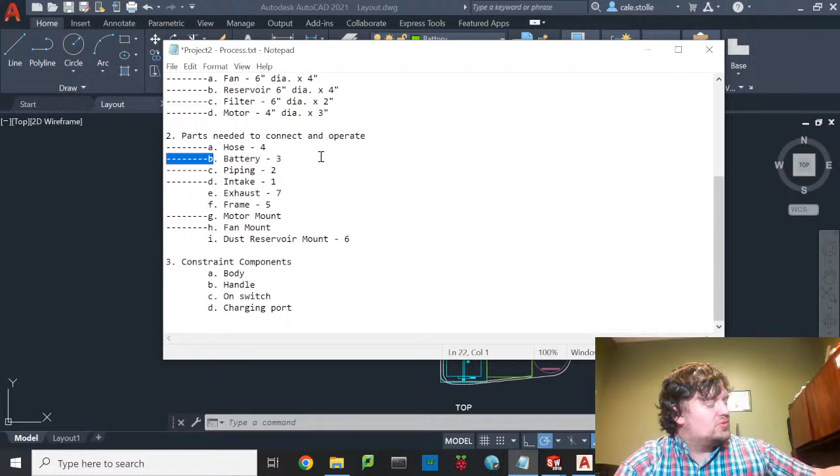I should probably move the microphone a little closer. If I talk right into it, it'll be super loud. Most people who aren't paying attention would just be like, ah, that'd be fantastic.

Our next step - I had this labeled out. We had to come up with the intake, piping, battery, hose, and lastly we have to come up with a frame. Now, the reason why you could have technically made a frame prior to designing all those components...

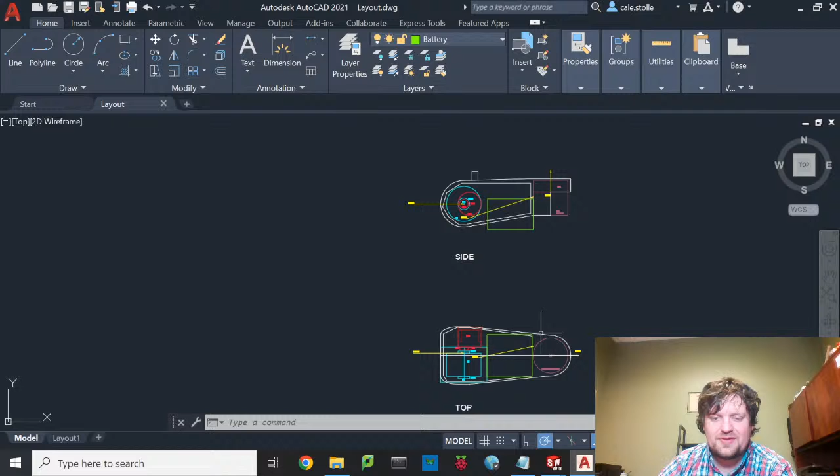Really you could have designed a frame after this and just tried to modify the frame to fit in these, but I don't really want to have to modify the frame. I kind of want the frame to just fit around everything.

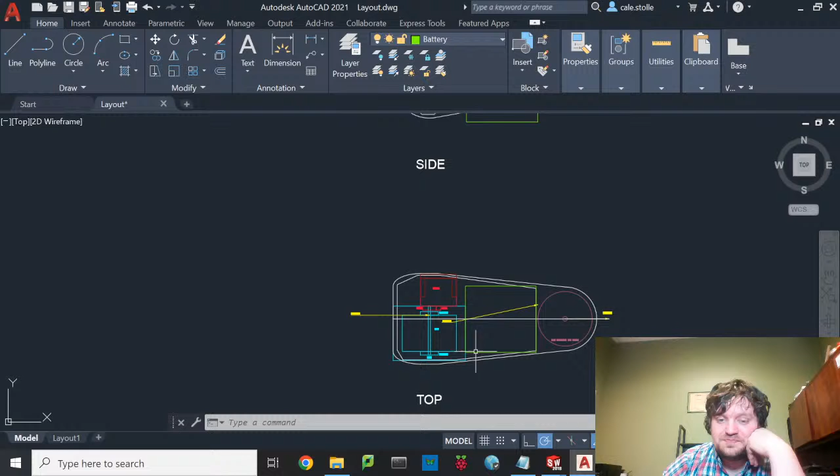So here I've got all of my components labeled. I did discover that my battery is going to have to be sitting under my piping, and I may have to adjust the piping, but I may just be okay with the battery sitting really low. That's actually where I'm going to be closer to, but basically the shape of my frame is going to have to come up here.

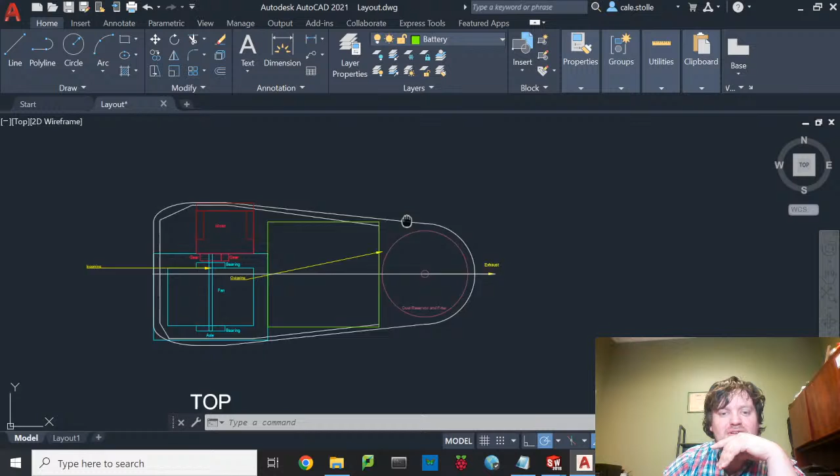It'll have to go around this motor mount, come down here to this fan mount, and it'll probably be kind of a squarish shape. So that's what my frame is going to kind of look like.

You'll notice that I put this in the actual vacuum outline layer. Yeah, I guess that's kind of frame material though. But that's kind of where I want my frame to be.

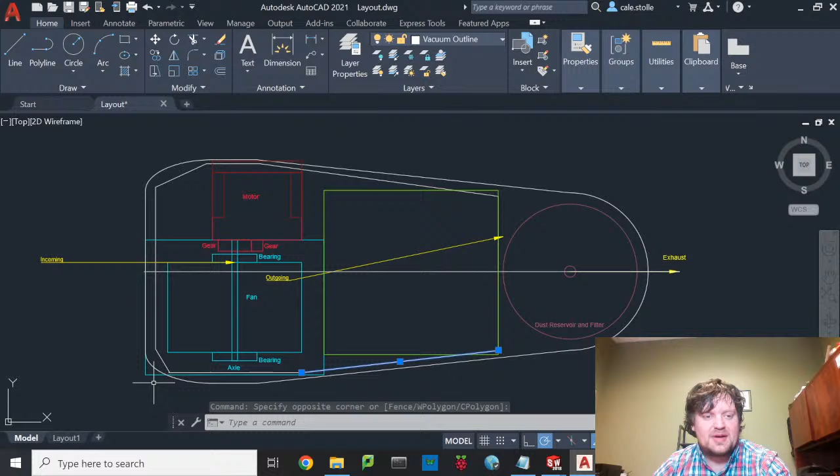I want my frame to wrap around the back edge of this, wrap around this, come down and kind of wrap around this dust reservoir.

Now, my purpose here in building a frame is the frame is going to be the component that everything mounts to. So it's kind of the most critical piece.

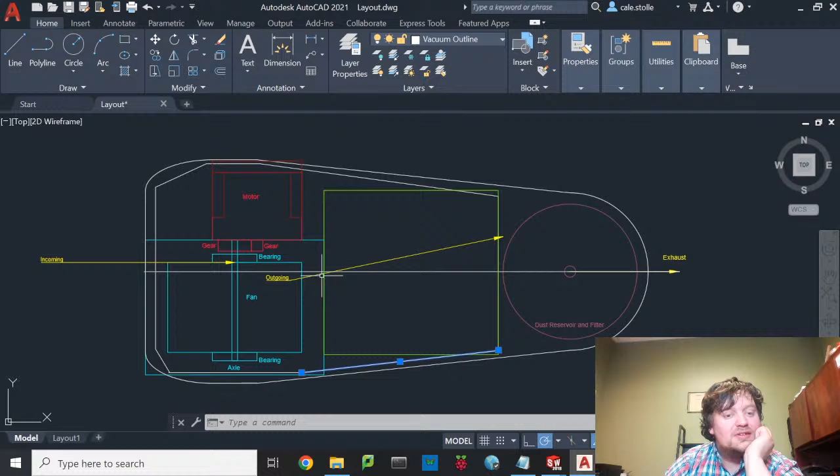What I am going to do very quickly is take some quick measurements in this drawing, because this will allow me to determine some sizes for when I design my frame.

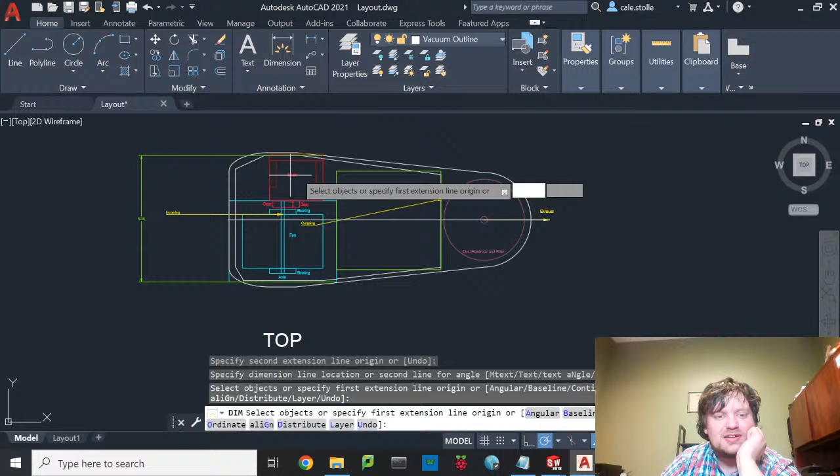So here this is 9.35 inches. What I'll probably end up doing is making a 9.5 inch wide frame.

And I don't remember what this dimension here is. That is 8 inches. Okay.

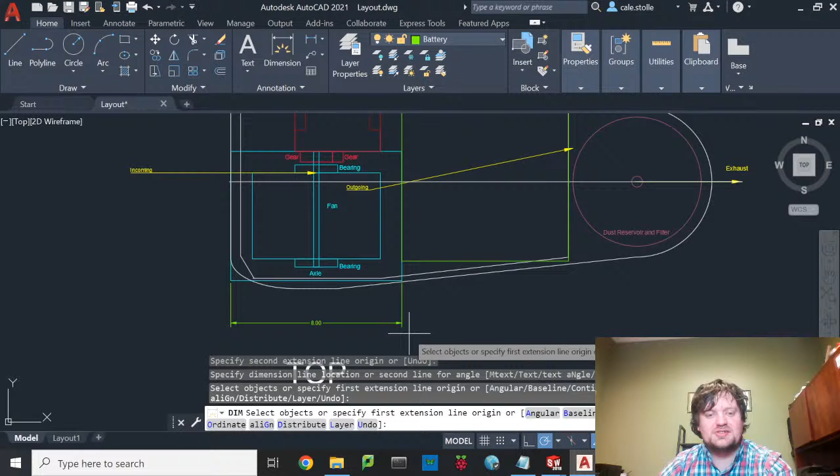So in this view, it'll just be a simple shape that wraps around like this. In this view, I do kind of want it to look like this, so I'll probably just cut out a piece and maybe round the front.

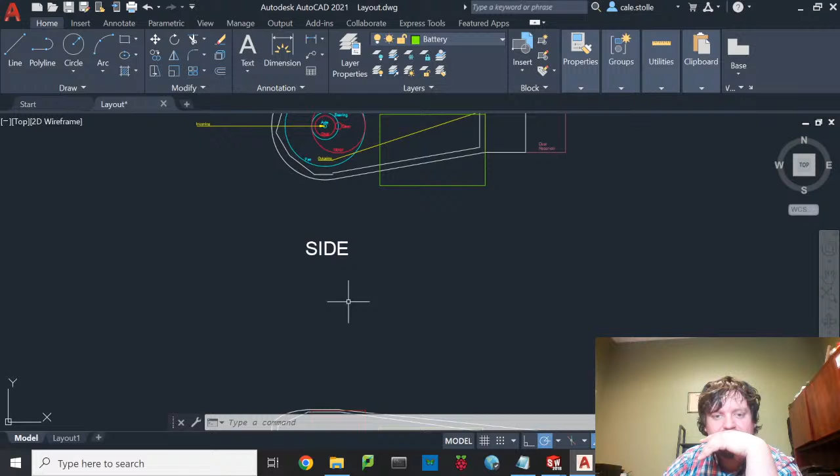We'll start by making this profile shape here, kind of a rounded piece that goes up like that. And then we will cut into it.

Basically, I'm going to make it a hollow box so that it'll wrap around the fan mount over here, but then have a flat surface for the motor mount to mount back here.

And then it'll be a flat surface here, and I could just put a protrusion here and here to connect onto the dust reservoir. So that's how we will design it, and we're going to make it 9.5 inches wide this way by 8 inches wide that way.

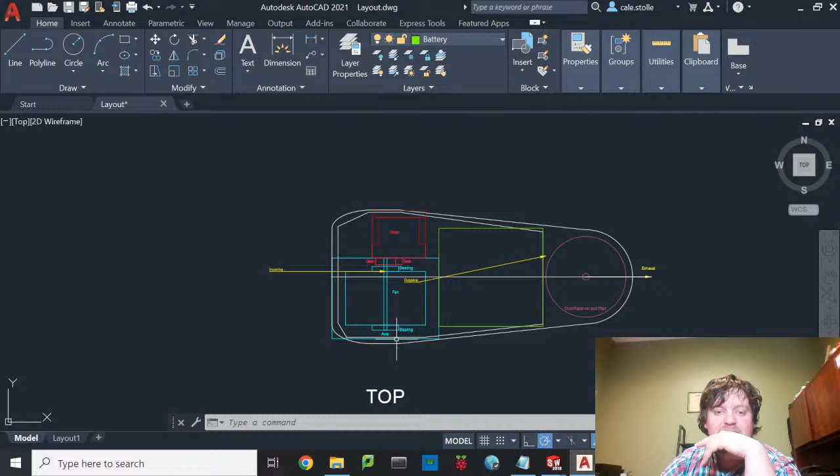So go ahead and drop out of this. I'm going to say no because I didn't really make any big changes. And we'll go ahead and pop up SolidWorks. I only had 2 instances of SolidWorks running. Well done, Cale. Well done.

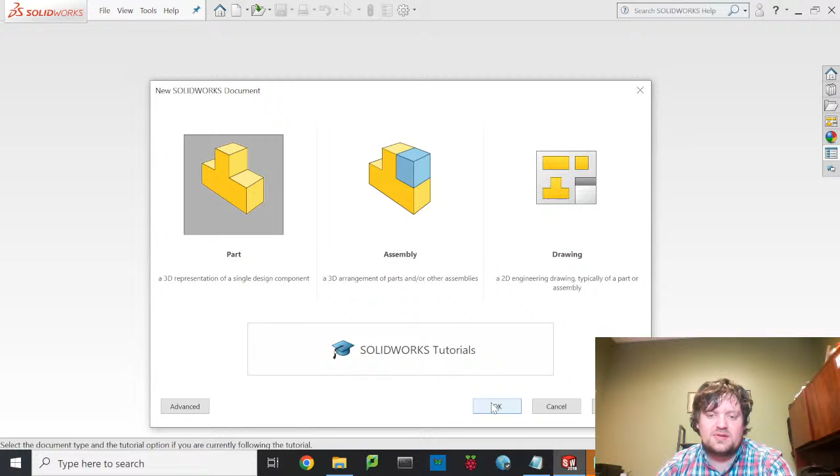So here we'll create a new part. This new part is going to be our frame. I'm just going to make it really simple, because the more complex you make the frame, yeah, it allows you to shape it. You want your frame to fit inside of your body, and it has to be something that everything mounts to, but I feel like the more complex I make it, the more work I'm just creating for myself.

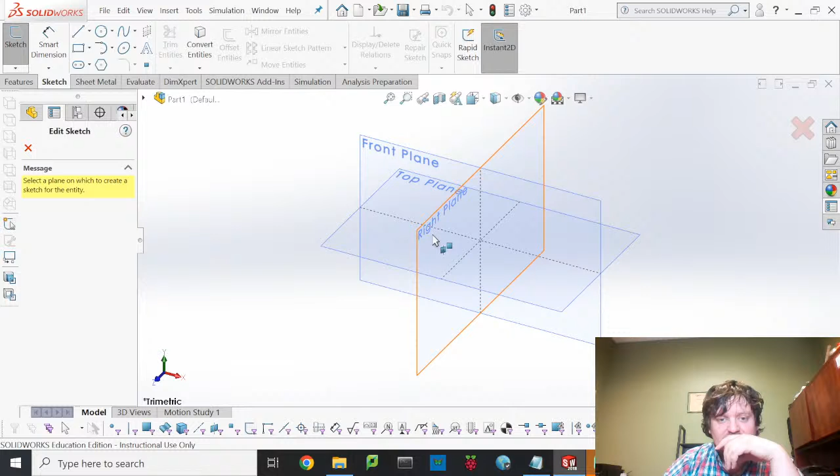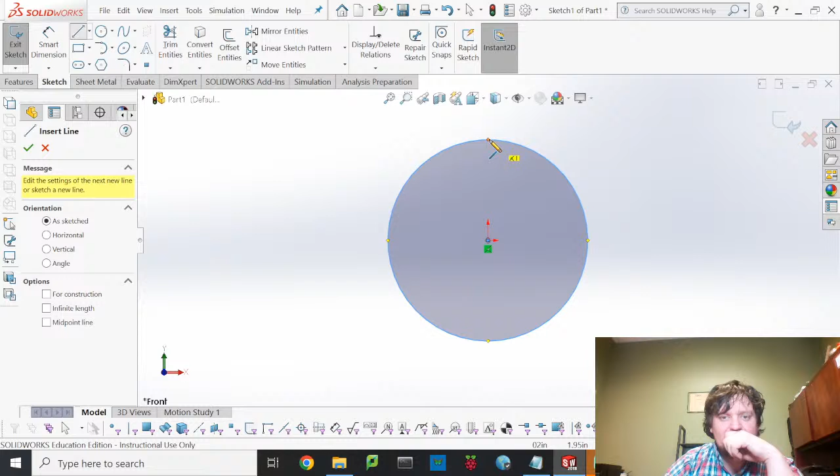And I'm going to create that profile view. Now, where do I want the center of this to be? You know what, I'll make the center of this be the center of the fan axle. So make it this. Then what we'll have is a line that connects from the top of this circle, goes over like this, then comes down and attaches here.

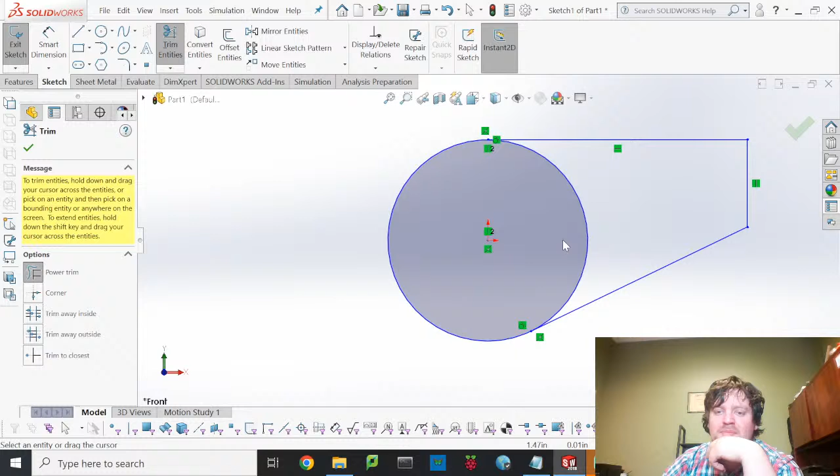Now you'll notice that the way I drew that line, this is tangent. Otherwise I could add in a tangent relation. This one is also tangent, but I mostly care about it being in line with that. Now I'm going to do a quick trim, cut that piece, and now I've got to assign some dimensions to finalize this. I've already got my tangent relation here, and here I've already got my coincident relation. I've already got this being a horizontal relation. This right here already has a vertical relation between this point where this line begins and this center line. All of those are things that I want.

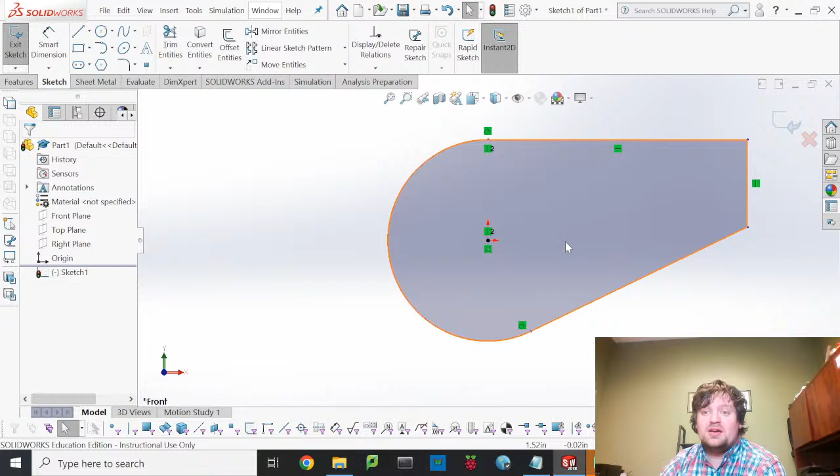So yeah, a couple of dimensions should be all I need to round this out. Now, the way that I have this designed, this is an 8-inch circle that goes into the inside. My frame is going to be about 1/8 inch because it's going to be 1/8 inch, probably ribbed aluminum or something. I'm going to model it as a solid piece of metal, so it would be a lot heavier the way I design it than it would actually be implemented in real life.

But I had the same thing for the battery. I didn't put any air inside the battery, so it seemed like it was like 12 pounds.

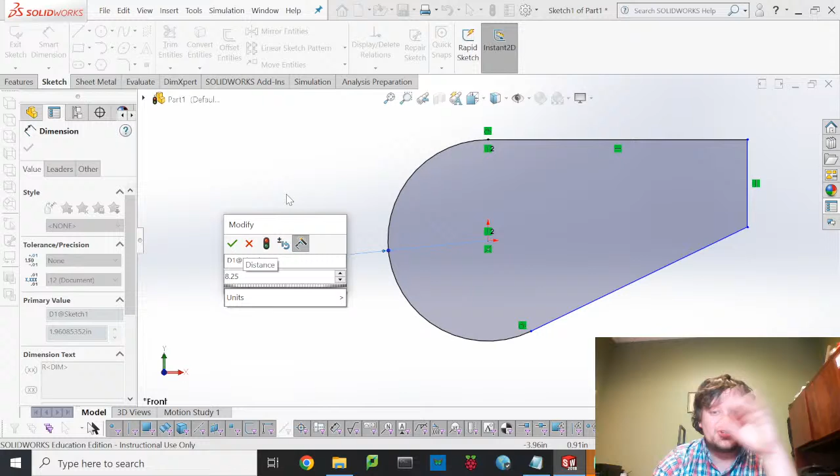Whatever. Here, if I do an 1/8 of an inch on both sides of that fan mount, that does equate to this having a diameter of 8.25 inches. Otherwise, a radius, which is what it's asking for, of 4.125 inches.

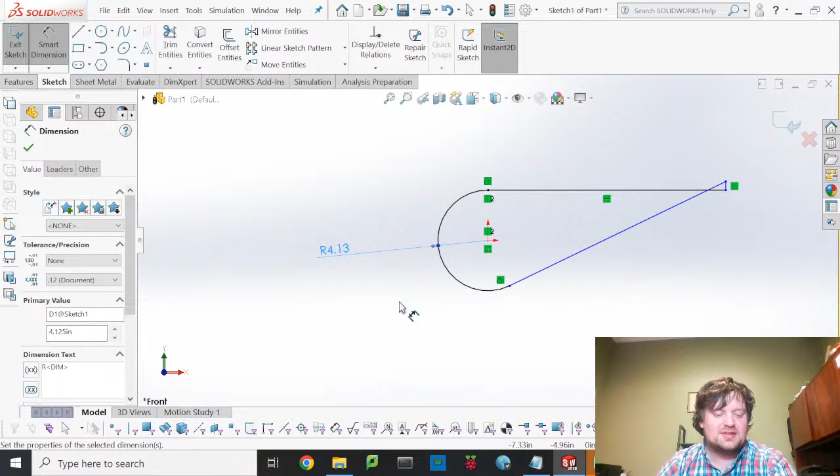I'm going to hit Control Z before I dimension this. Okay, and then we'll go off here, and I'm going to instead start with 4.125 because that's a radius, modeling the radius. Notice how earlier when I set it to 8.25 and then adjusted it, it shifted the drawing. The first dimension you put down is going to basically provide a size for the entire drawing.

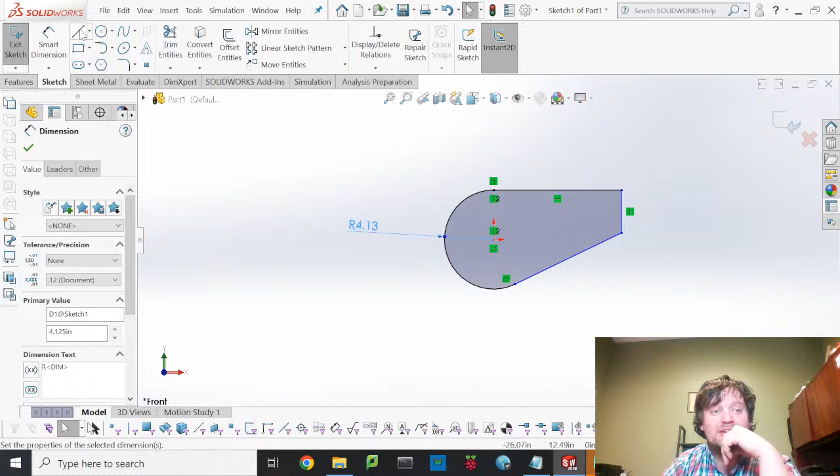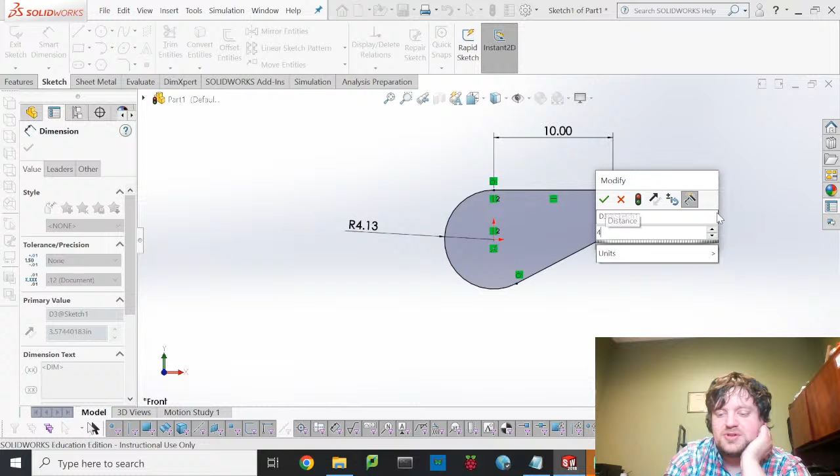So that's one of the nice features about SolidWorks. You don't have to draw it to size, it'll figure out what size you want later on. Okay, so back here, let's see, I don't know, I think that was like 10 inches. I can always come back in and adjust. Here, I'm going to set this at 4 inches, and this should fully dimension my drawing.

So there we go, I'll exit sketch. What I'll do is I will extrude this that direction, and then I'll just punch a hole through the top of this thing. Pretty easy, easy peasy lemon squeezy.

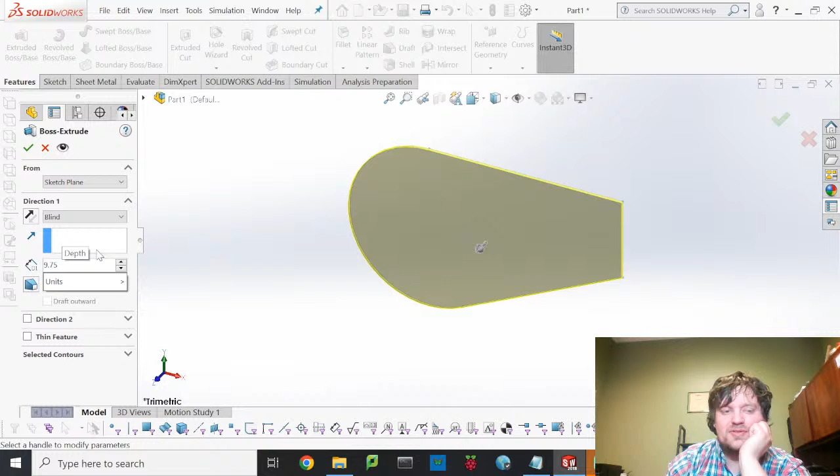So here, the thickness of this was 9.5. Since I want this to be 0.125 on both sides, that's going to mean 9.75 inches.

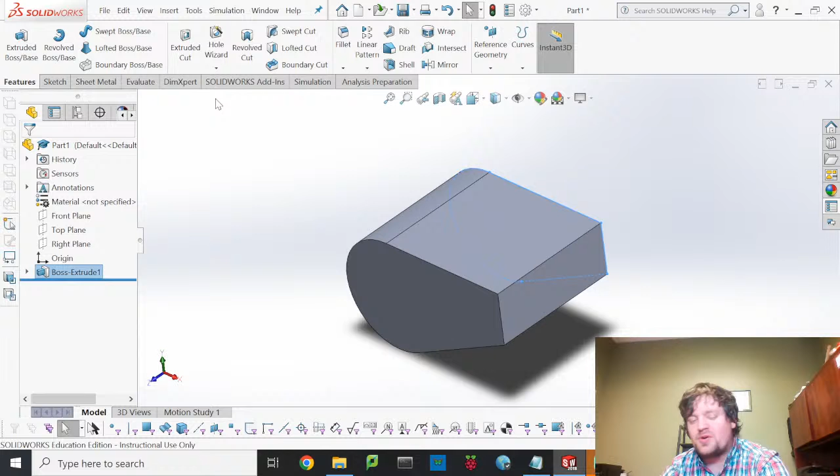Now, if this was a solid block of metal, this would be the most heavy vacuum since the 1990s, when every vacuum was this heavy. All of you fortunate people who didn't have to vacuum in the 1990s. By the way, all of my muscles came from vacuuming in the friggin' 1990s. And it was like, hey, can you go vacuum the front room? Like, all right, I've been training my whole life for this.

Seriously, why were those things so heavy? It's because they used solid metal frames. They didn't use ribbed metal. They didn't use any of the modern manufacturing plastic methods that we have of making frames that are actually nice. I guess I should probably make this out of like plastic. You can make a really hard plastic way lighter than even aluminum.

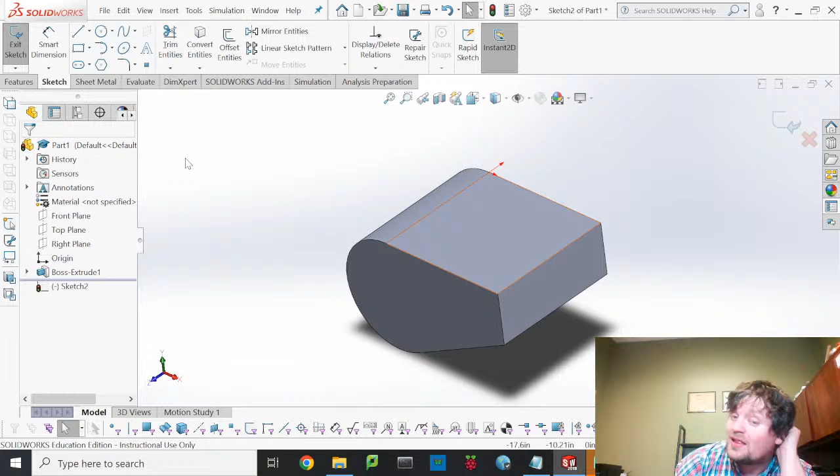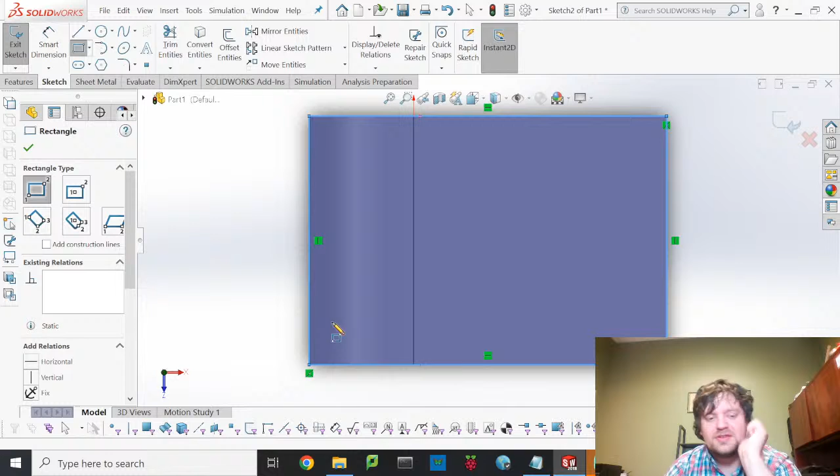Man, I digress. So I'm going to draw on this top plane, and I'm just going to cut out a shape. I'm going to start by drawing this rectangle, selecting this rectangle and setting it for construction. Well, I guess I have to do that on every one of these lines. Escape. So now they're all just construction lines, including this one. Nice, alright.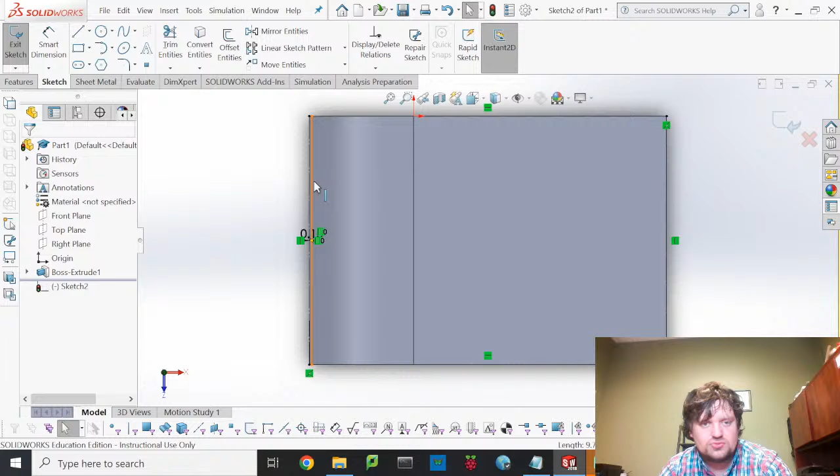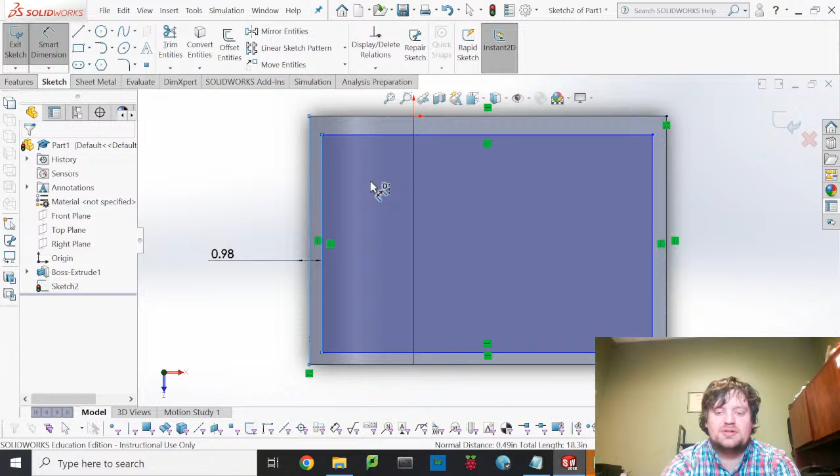Now what I'll do is I'm just going to offset this. That was a mistake. Never mind, instead of drawing it offset, I'll just put it in dimension. Smart dimension, here to here, I want you to be 0.125. Okay, and I'll do the same here to here. And you know me, instead of dimensioning every one of these, which wouldn't really be that much of a pain, I prefer to put in relations.

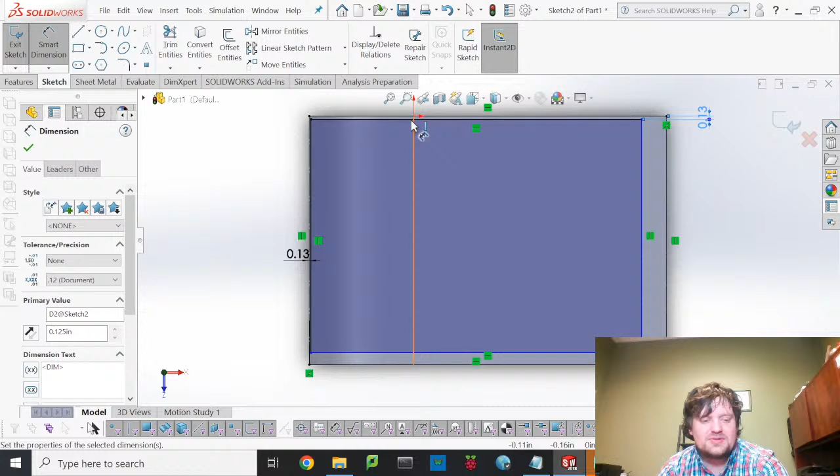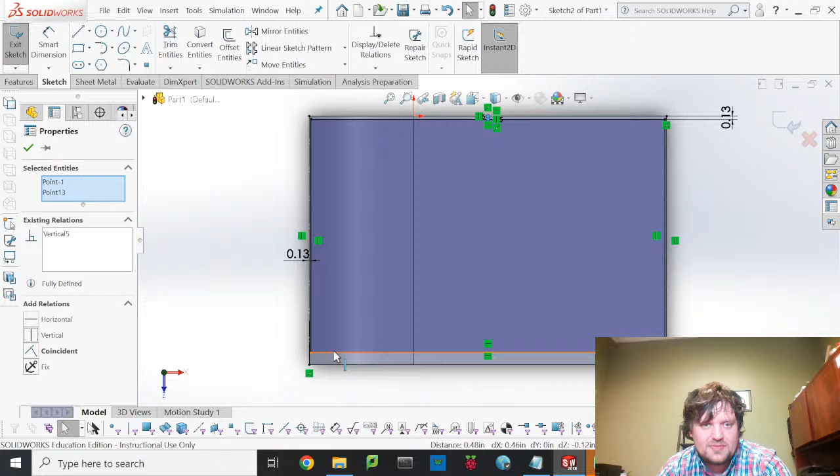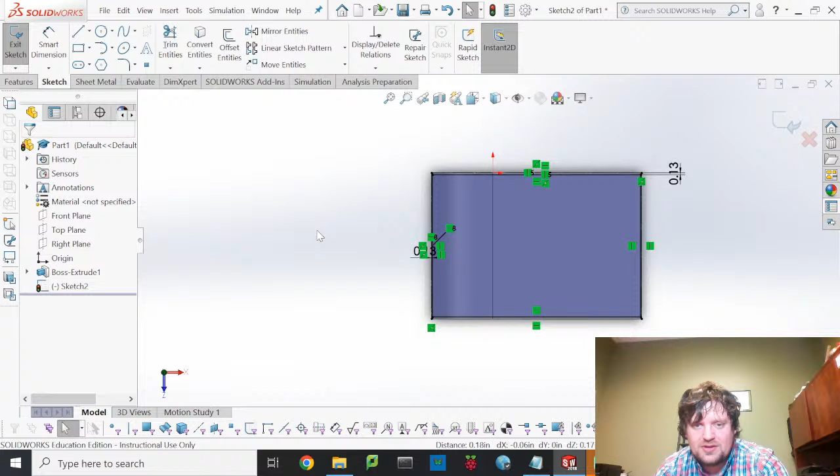So I'm going to go ahead and hover over this one, control click, and hover over the center point up here. Where are you, center point? There you are. With those both selected, it's a vertical. And you know where I'm going over here. Hit escape, hover over the center point, control click that one, hover over the center point, control click that one, set these two horizontal. And at this point, the drawing is fully defined with 1/8 inch gap around the outsides, which is what I want.

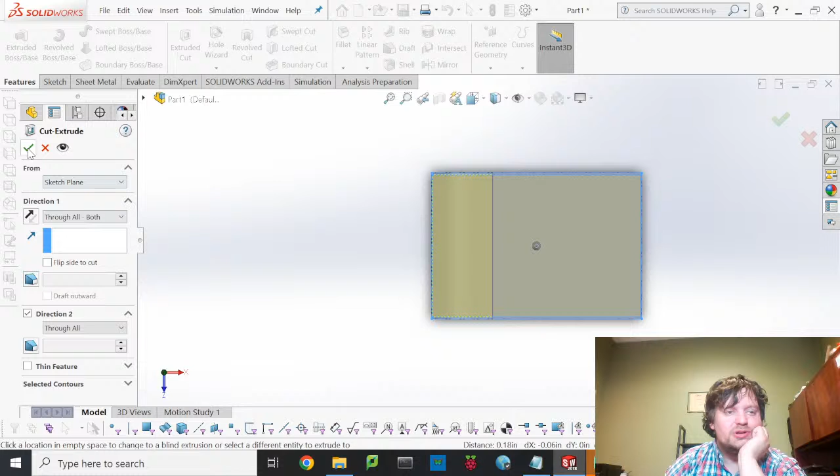So then I'll just do an extruded cut and go through everything, and that'll be my frame. I don't want to do a blind cut, just want to cut through.

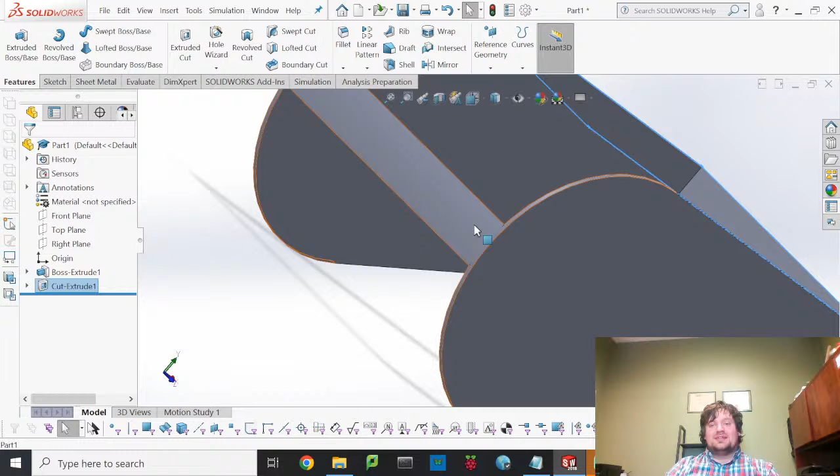Now you'll notice that because I cut this, this piece is going to be extremely flat due to the way I cut it. I mean, that works, but that probably wasn't the best way of doing it. A better route would have been... let me go ahead and delete this.

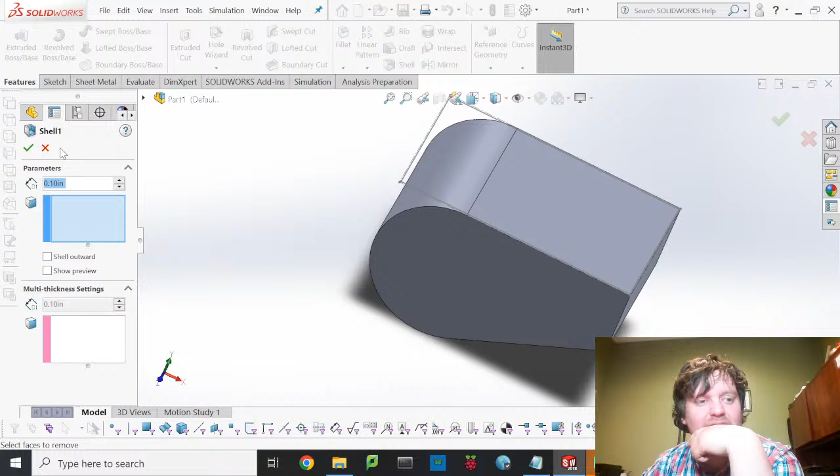A better route actually would have been to leave that sketch there and do a shell instead. Here I want the shell distance to be 0.125.

I didn't shell anything, I don't even know why it saved that feature. I'm going to pick this bottom surface here. Okay, then I can show a preview. It basically shows that it shells the whole thing.

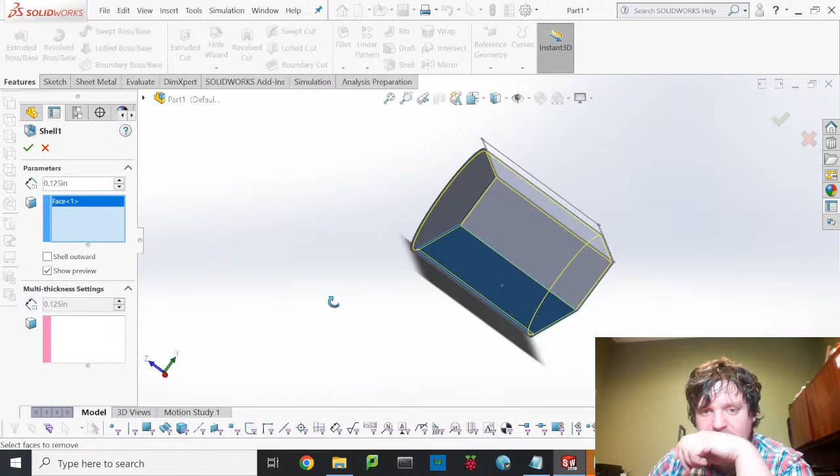Yeah, I like that, so yay. Now what I'll do is I'm actually going to keep everything but this top piece right here.

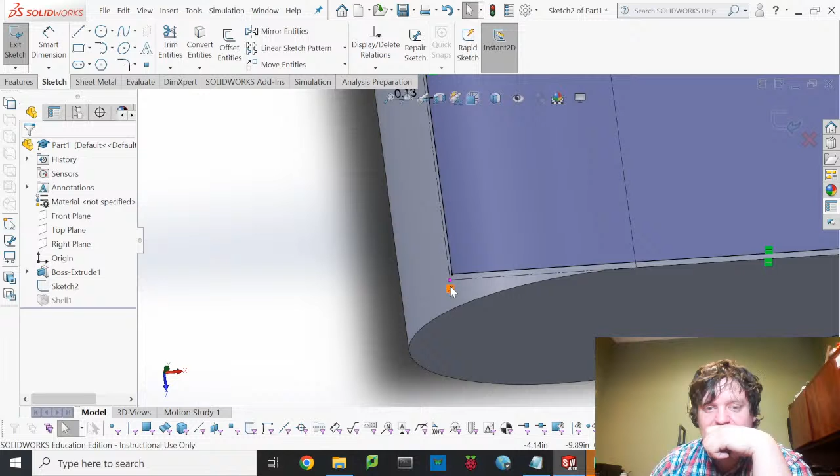So I'm going to go back and edit this sketch. Instead of having this point be coincident with the outside point, which is a projection of that corner, what I want is to pick this point, go over here and control pick that point, and set those to be coincident. It's going to adjust this a little bit.

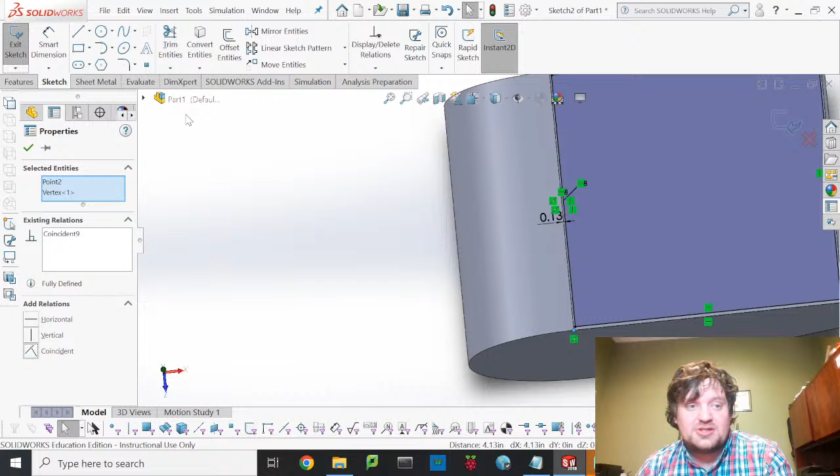Now it'll allow me to cut this so that my frame is pretty rigid right here, but otherwise it's open. So as soon as I do that... oh hey, right, my bad, I deleted the extruded cut.

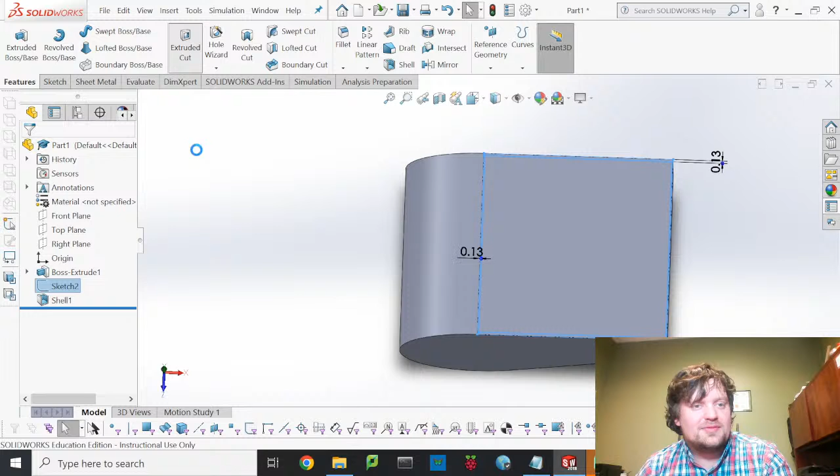I'm once again just going to do through all both. Oh no! There we go.

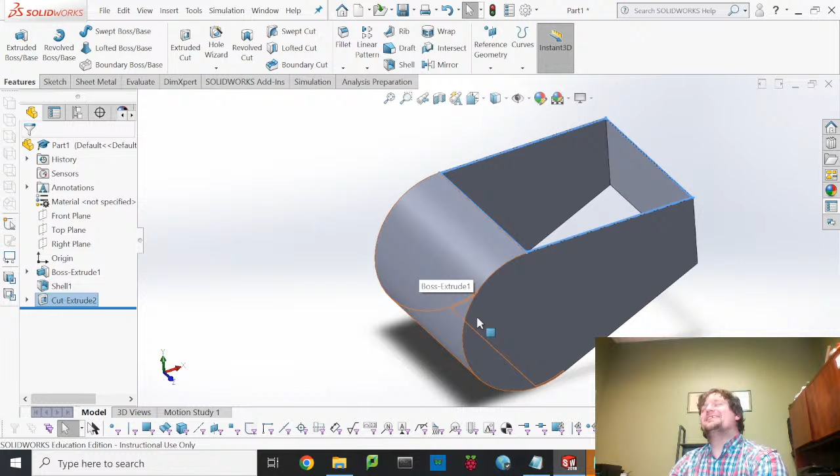So now I have a frame that is a full 1/8 inch, that doesn't just shave the front here, which was a terrible idea on my part. I didn't even think about that. But this is a solid frame.

Now, what I'm going to be doing from here, the next steps in building this frame, is I have to actually create holes to mount components to it. That is a little time consuming, but that is my next step. Having just a frame to mount everything to is the first step.

Now this is kind of a blocky frame, but it's a very, very good piece to start with. I can't emphasize this enough: as a first prototype, you don't mind if it's a little clunky, because it's a prototype, not a full manufactured product. This isn't a final product by any means.

When we go back and actually finish this design, we'll be able to look at the full design and say, okay, there's air space right here where we can bring that frame in, or we can move this part and bring that frame in, or round the frame here, make it lighter this way, find a better battery, find a better motor. There's tons of different ways we can use to really lighten this model up.

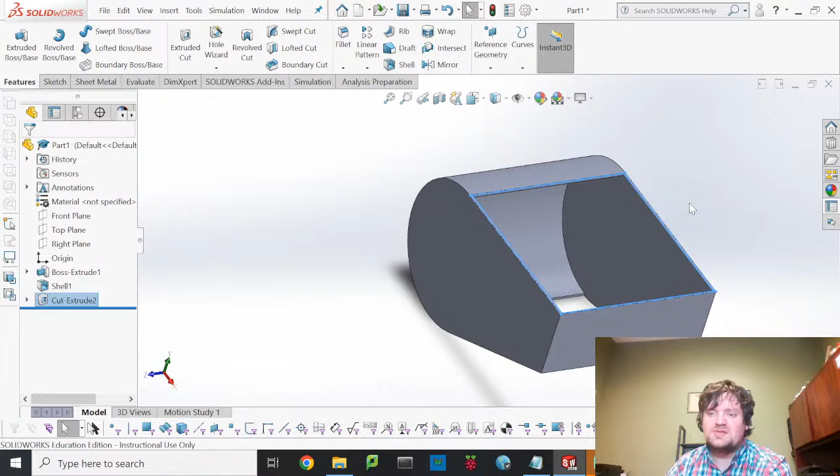But this is a first prototype. The idea is optimization is a future design process; generation is the first one. You have to be really kind to yourself in the generation process. This isn't a final product, it's a prototype.

So I'm going to go ahead and leave this as is. We've basically designed our frame. In the next video, what we'll do is put some mounting locations for all of our components.

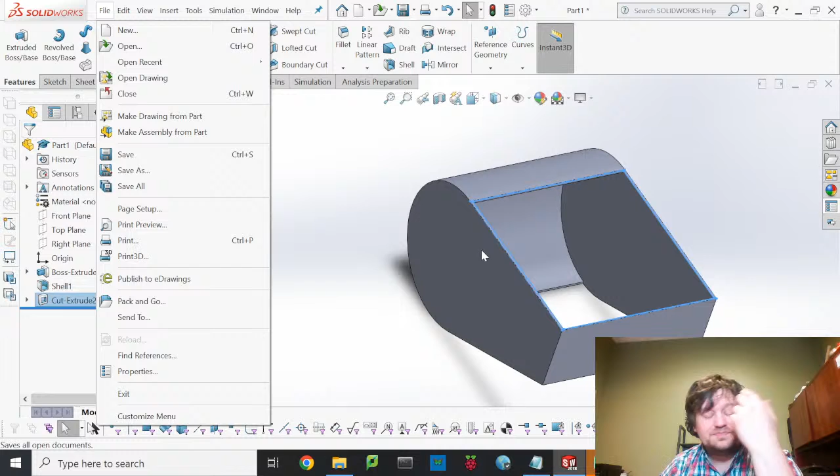So here we'll mount the... oh shoot, I didn't give enough space for the intake. I'll probably end up cutting a hole in this so that the intake can pop out of it. Yeah, but I'll have to cut a hole in this for the intake, and mount the actual... wow, I just didn't prepare for the intake at all. I completely forgot about the component.

But then I'll start building an assembly where all of my components come in and fit neatly into this frame, including the battery that I built, including the dust reservoir. Everything is going to be coming in here and fitting into this frame. So that's going to be my next video. We'll have to do some modifications, and it will be kind of a longer video.

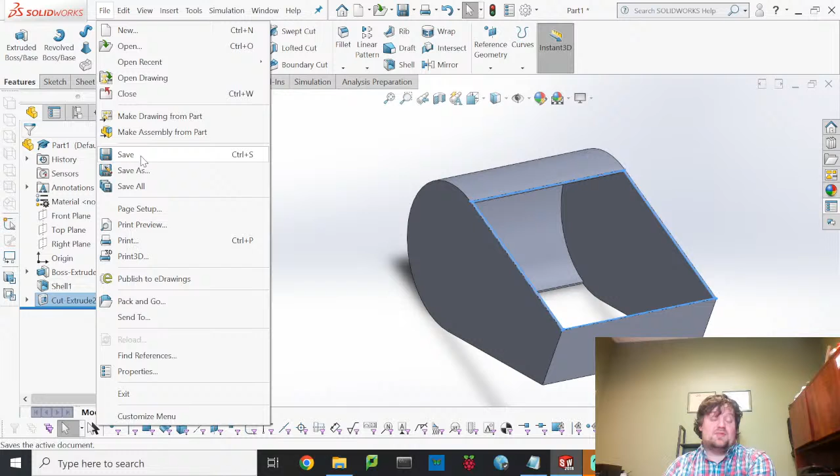But I've got a frame. I'll hit save, I'll call this frame. And that's it. All right, I will see you in the next video so that we can finalize the design of our frame, assemble everything, and be one step closer.